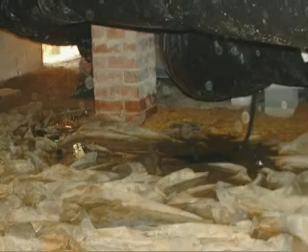This first crawl space, we see a large puddle sitting on top of the ground poly. In the second view, we're looking at water wicking through the below-grade walls. All of this extra moisture in the crawl spaces leads to a new building problem, crawlspace mold.

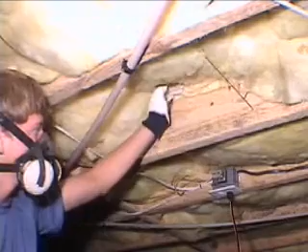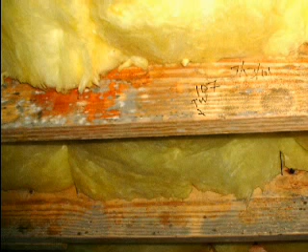Crawlspace mold ranges from light spotting to heavy staining, and more homeowners and builders are becoming concerned about crawlspace mold because of the potential health effects it may be having on people that live in these homes. Here's some keys to think about to control crawlspace mold.

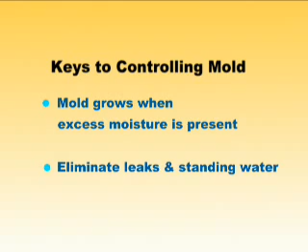Mold will grow on wood and any other organic material when excess moisture is present. So what you need to do is to eliminate water leaks and standing water, and particularly when it comes to crawl spaces, is to keep the crawl space moisture levels below 70%.

Here's our field study test site. It's a 12-home subdevelopment located in eastern North Carolina in the town of Princeville. These homes are located on a cul-de-sac street. The house size is 1,040 square feet. When we look at the back of the houses, we can see that the site is well graded for drainage. The home site was elevated approximately 3 to 4 feet above grade to raise it above the 500-year floodplain.

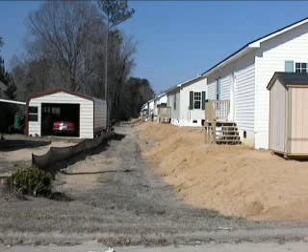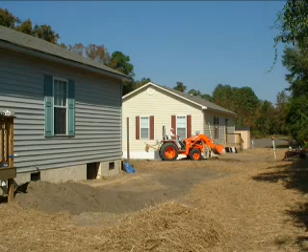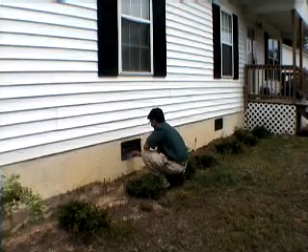During the experiment setup, all crawlspace-related moisture issues were resolved. These efforts included correcting construction, grading, and drainage problems, sealing any foundation holes that could allow water entry, and fixing plumbing leaks. The crawlspaces in these test homes average about 2 feet high, and virtually all of the wall area in the crawlspace is above grade. 10 standard-size 8 by 16-inch foundation vents ventilate the crawlspaces.

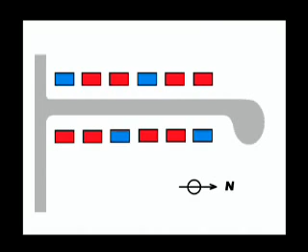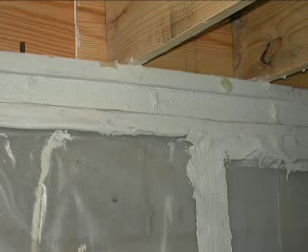In addition to the wall sealing work, we installed crawlspace liners to minimize water vapor entry from the earth floor and through the masonry walls. The liners were created by extending the 6 mil ground poly up the walls. At the top edge, the wall poly stops 3 inches short of the wood sill. This provides us with a clear termite inspection strip. We use duct mastic to seal all edges and seams of the poly liner.

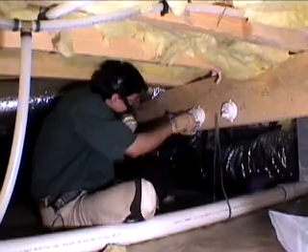To monitor the moisture performance of the field study, we rely on small battery-operated data loggers. These sensors, which are installed in the crawl spaces, the homes, as well as outdoors, record the temperature and relative humidity every 15 minutes. In the first 2 years of operation, we have now accumulated over 5 million readings. Let's take a look at a summary of this data.

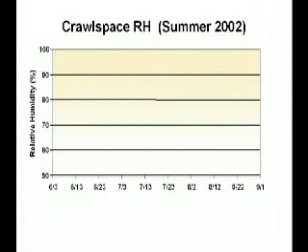We can use this graph to compare relative humidity conditions for the summer of 2002. The first line to draw in on the graph is the outdoor conditions. Since this test site is in the hot and humid climate area of eastern North Carolina, it's not at all surprising to see that outdoor humidity levels stayed high most of the summer.

Now, let's display what happened in the control group of wall-vented crawl spaces. As this line draws in, notice how closely the crawl space moisture levels follow the outdoor conditions. These crawl spaces stayed damp with relative humidity levels above 70% most of the humid summer.

Finally, we can show the experiment group performance. In sharp contrast to the wall-vented crawl spaces, the moisture level in the closed crawl spaces did not follow outdoor humidity conditions. Instead, the closed crawl spaces stayed dry with relative humidity levels below 60% all of the time.

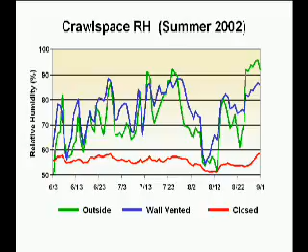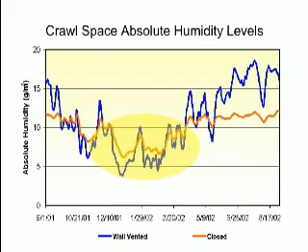This next graph shows what absolute humidity conditions were for an entire year in the field test. Absolute humidity is a measurement of how much water vapor is in the air. And this graph reveals that during the winter, both the wall-vented and closed crawl spaces reached their driest conditions, and they ended up performing about equally well. Since winter ends up resulting in drying conditions for both groups, crawlspace moisture control efforts really need to focus on the wetting effect that hot, humid weather has on wall-vented crawl spaces.

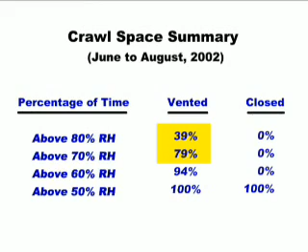Now let's summarize this graph information in table form. From June to August 2002, the wall-vented crawl spaces stayed above 70% relative humidity 79% of the time, and they stayed above 80% relative humidity 39% of the time, while the closed crawl spaces never got above 60% relative humidity. To effectively prevent mold blooms, crawlspace moisture levels should be kept below 70% relative humidity.

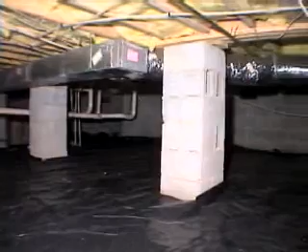These results also bring into question the effectiveness of ground vapor retarders in controlling crawlspace mold. Many building professionals have thought that a full coverage layer of 6 mil poly on the ground was the main strategy needed to control crawlspace moisture. The field test results do not support this belief when it comes to mold prevention. Despite the carefully installed 100% coverage ground poly, excess moisture continues to enter and remain in the wall-vented crawlspaces. This excess moisture creates a damp, mold-friendly climate in humid weather conditions.

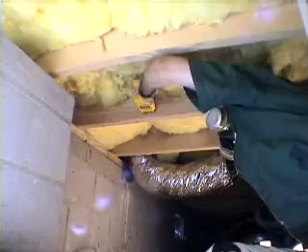In addition to space moisture measurements, we also record wood moisture content. A total of 10 pin moisture readings are periodically taken in the crawlspaces during data collection trips. The pin moisture readings parallel the space moisture readings. The closed crawlspaces have lower wood moisture content than the wall-vented crawlspaces, particularly in the summertime. Dry wood framing discourages surface mold, wood rot, and insect infestation.

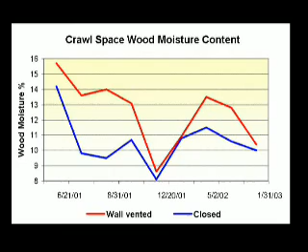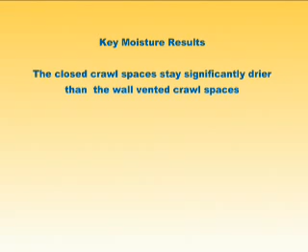The field test has operated for several years now. The experiment has operated long enough that the moisture performance characteristics have become stable and predictable. Here are the key moisture results. The chief finding is that the closed crawlspaces stay significantly drier than the wall-vented crawlspaces.

Second, the foundation vents add excess moisture to the crawlspaces during wet and humid weather, particularly in the summertime. This excess moisture promotes mold growing conditions. The last finding is that ground vapor barriers by themselves do not keep crawlspaces dry enough to prevent mold growing conditions.